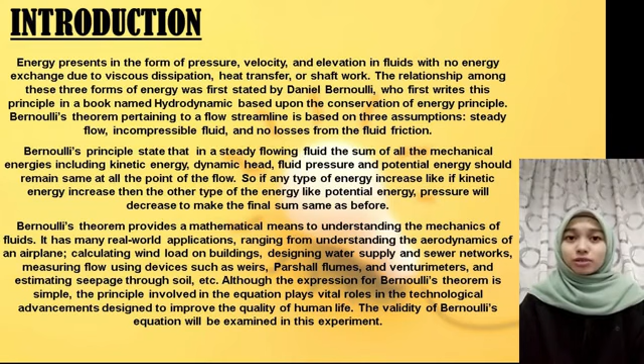Although the expression for Bernoulli's theorem is simple, the principle involved in the equations plays vital roles in the technological advancement designed to improve the quality of human life. The validity of Bernoulli's equation will be examined in this experiment.

Bernoulli's principle states that as a fluid passes through a system of pipes, when the pressure drops, the velocity increases. So as an example, I have this pipe. When I open this pipe, the water flows normally. But as I apply a pressure, the internal pressure decreases, causing the water velocity to increase, thus forming a high velocity fluid.

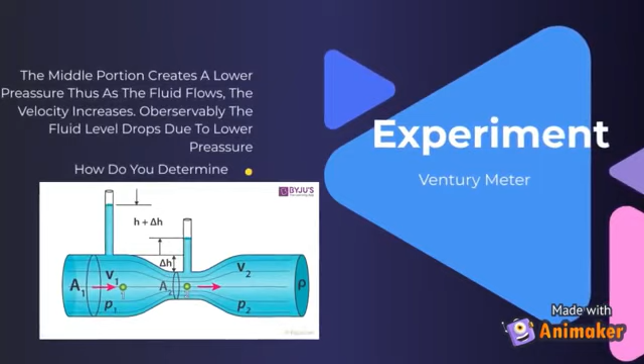I am Ibemi Sherlimui. I will present the apparatus used for the design and how to set up the apparatus. The apparatus are bottle, straws and tube, scissors and cutter, hot glue gun, soldering iron, and ABS solvent. Next is the procedure in setting up the apparatus.

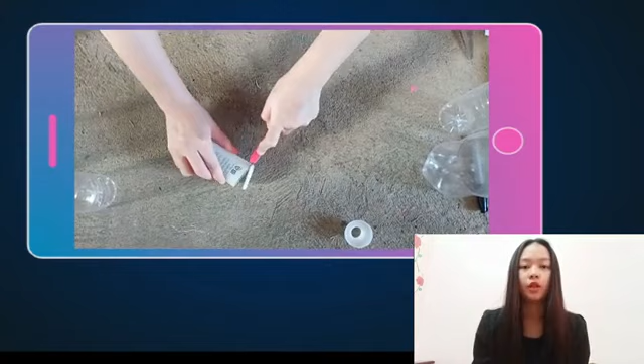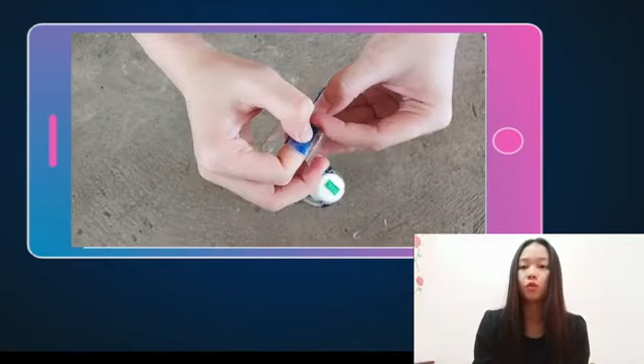First, cut up the cylindrical bottle to make 3 different diameters of pipe. Each diameter was measured and recorded. Then, about 5 cm of the top part of the small bottle was cut. This part acts as a constricted section of the design. Mark the diameter of the small bottle at the bottom part of another large bottle. Then cut the bottle according to the mark so that the small bottle fits into the large bottle.

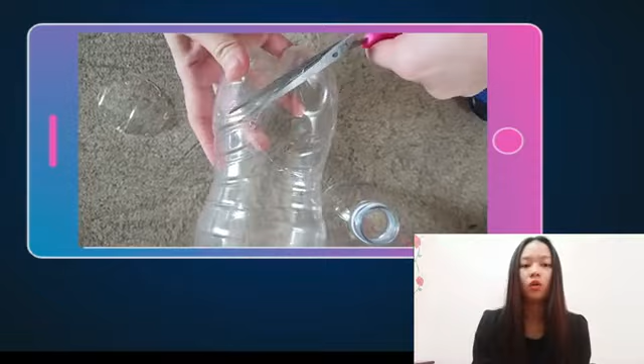The bottles were then glued together with the hot glue gun and left to dry. This step was repeated to get another similar design as the previous bottle. Next, make a hole in the tube using the soldering iron to fit the straw at the hole. Glue all the parts to get 3 models with different diameters. These are the 3 different designs.

To conduct the test, 4 liters of water was poured into the model. The time for the water to reach a steady state was recorded. The height difference was recorded when the water is in a steady state. The process is repeated for the second model and the third model.

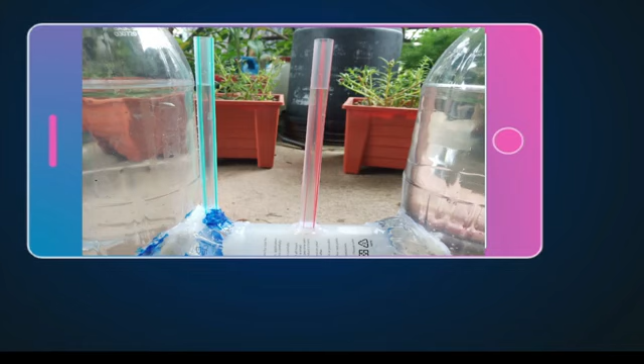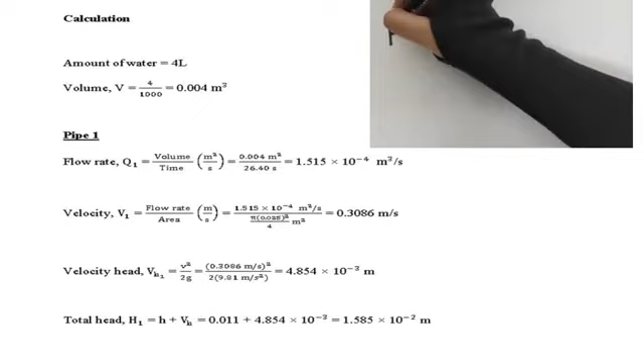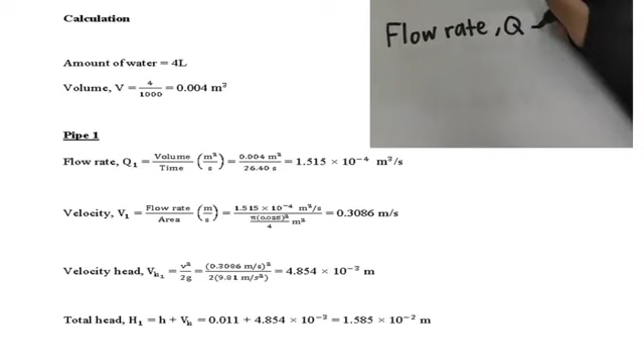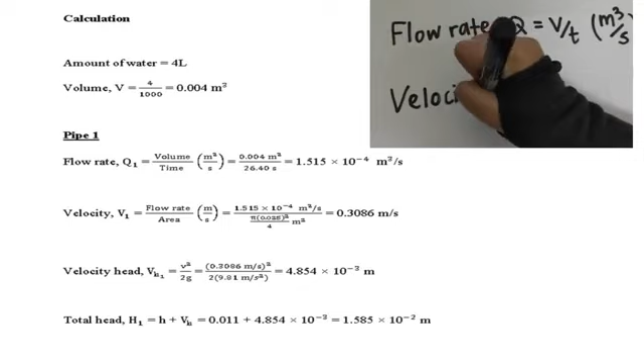So these are some formulas that we use in this experiment. First, we calculate the flow rate. Flow rate is equal to volume over time, in the unit of meter cube per second. Then we calculate the velocity. Velocity is equal to flow rate over area, in the unit of meter per second.

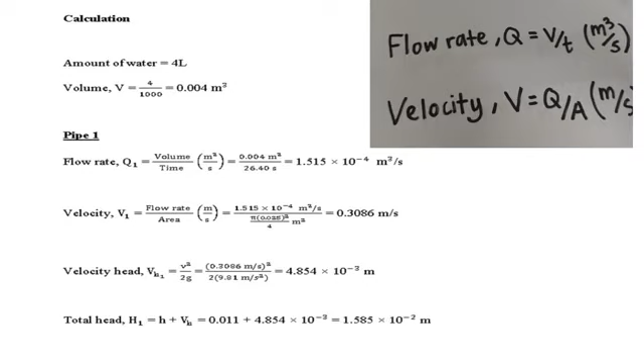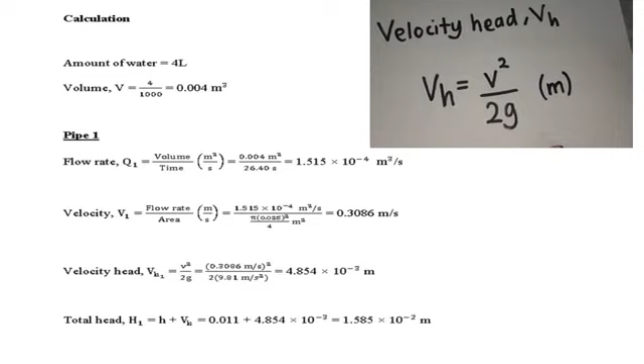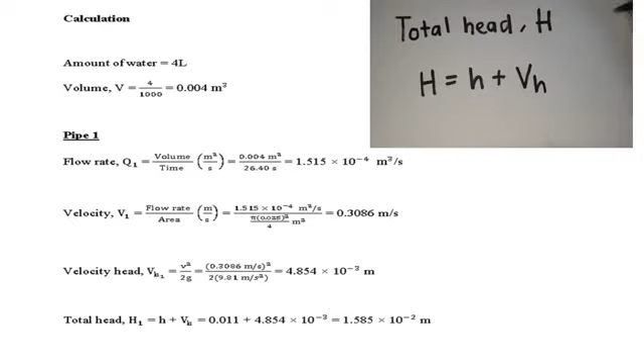Then we calculate the velocity head. Velocity head is equal to velocity squared over 2 times gravity, in the unit of meter. After that, we calculate the total head. Total head is equal to h plus velocity head, in the unit of meter.

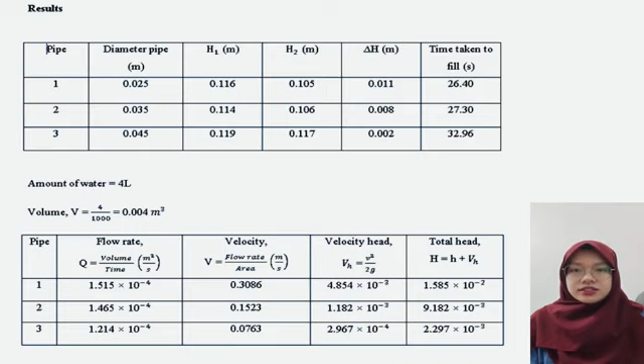Assalamualaikum, my name is Anis Nabila and I'm going to explain the results and the calculation in this experiment. For the first pipe, the flow rate is 1.515 × 10^-4, the velocity of pipe 1 is 0.3086 meter per second, the velocity head for pipe 1 is 4.854 × 10^-3, and the total head for pipe 1 is 1.585 × 10^-2.

For pipe 2, the flow rate is 1.465 × 10^-4. Velocity for pipe 2 is 0.1523 meter per second. Velocity head for pipe 2 is 1.182 × 10^-3, and total head for pipe 2 is 9.182 × 10^-3.

Lastly, for pipe 3, the flow rate is 1.214 × 10^-4. Velocity for pipe 3 is 0.0763 meter per second. Velocity head for pipe 3 is 2.967 × 10^-4, and lastly the total head for pipe 3 is 2.297 × 10^-3.

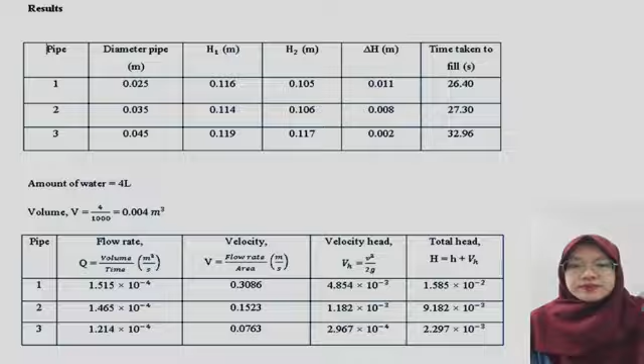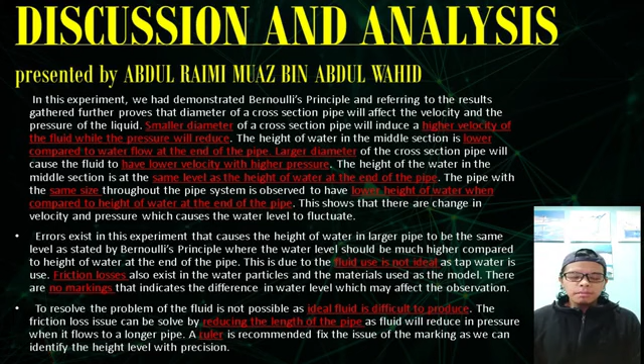In this experiment, we demonstrated Bernoulli's principle, and the results gave further proof that the diameter of a cross-section pipe will affect the velocity and the pressure of the liquid. A smaller diameter will induce a higher velocity of the fluid, while the pressure will reduce. The height of the water in the middle section is lower compared to the water at the end of the pipe. A larger diameter will cause the fluid to have lower velocity with higher pressure.

The height of the water in the middle section is at the same level as the height at the end of the pipe. The pipe with the same size throughout the pipe system is observed to have a lower height of water compared to the height of water at the end of the pipe. This shows that there are changes in velocity and pressure which cause the water level to fluctuate.

Errors exist in this experiment that cause the height of water in the larger pipe to be at the same level, whereas by Bernoulli's principle the water level should be much higher compared to the height of water at the end of the pipe. This is because the fluid is not ideal, as tap water is used. Friction losses also exist in the water particles and the materials used for the model. There are no markings that indicate the difference in water level, which may affect the observation.